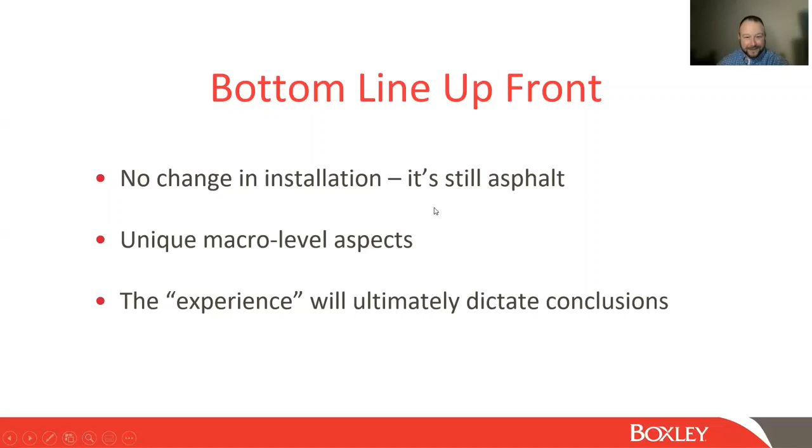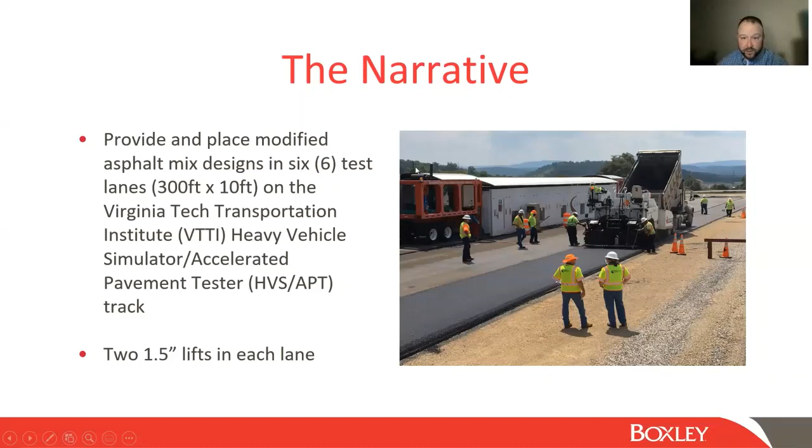The experience will ultimately dictate conclusions. Well, you just heard mine. So I'll get off that soapbox, and I'll go to the next one. All right, so here's what we were asked to do. Provide and place modified asphalt mix designs in 6 test lanes, 300 by 10, at the VTTI Heavy Vehicle Simulator Accelerated Pavement Tester. Two 1.5-inch lifts to make 3 inches total. We did not have to tack in between lifts.

Here's the designs. Regular typical production mix, 30% RAP, PG64, and that was our control mix. That was day 1. Day 2 was 30% RAP, but optimized with BMD. Day 3, 45% RAP, PG64, optimized with BMD. Day 4 was 45% RAP, PG64 plus rejuvenator to soften it up a little bit. Day 5 was 45% RAP with a softer binder, PG58. And day 6 was 60% RAP with a softer binder and rejuvenator, as you would expect, to soften up that high RAP content.

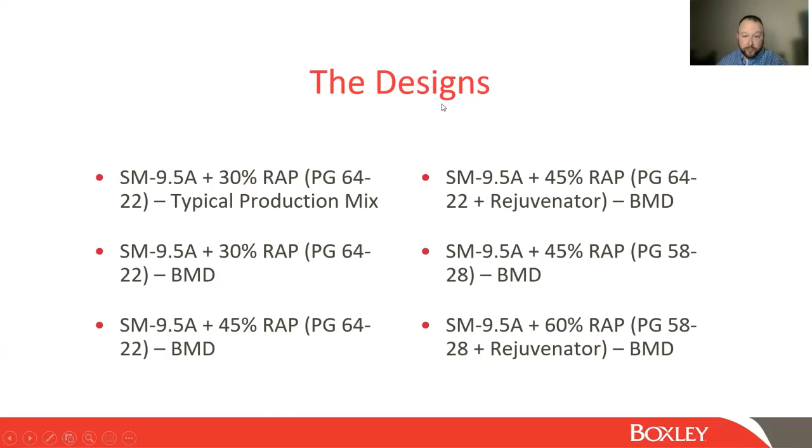Don't be afraid, I'm not going to go crazy into depth on all 6 of these mixes and everything. We would be here all day. I'm really focused on the field ops. Our plant personnel and our QC personnel did a wonderful job getting this ready and collaborating with the Research Council and materials, so we could actually put it down and get the equipment at VTTI on it, so they can do the actual research. And I'll let the professors brief us when all the research is done on how each mix performed. But we will give you our perspective as we saw it in the field.

I've already talked about this, and I'm going to reiterate it again. If you have a good relationship with your materials, like your VDOT materials department, like we do, and it's not just like we're friends out of work or anything like that, it's very professional. We were so impressed with how professionally Salem Materials ran this project. And not just them, VTTI, the Research Council, and the Asphalt Association sat in on a lot of the calls. It was truly a blessing and an honor to be a part of the people that were giving input and opinions on what we needed to do to get the project done.

So it was highly research oriented and plant driven, which is completely opposite to what I'm used to, getting as many tons down in a safe and high quality manner as possible. Didn't care about that. You were maybe laying 80 to 90 tons a day per mix. And you're there for 2 to 3 days each, and that takes up a week. Ouch. If you're doing that 3 days in a row on a normal job, something's going wrong.

Like I've said earlier, smart people everywhere, a lot of vested interests. So as a project manager, as an operations guy, when you get involved with some of these projects, just remember, it's not just you versus the customer, or you versus VDOT, which unfortunately sometimes happens in other projects. In this, it was collaborative from start to finish, and I was happy to be a part of it.

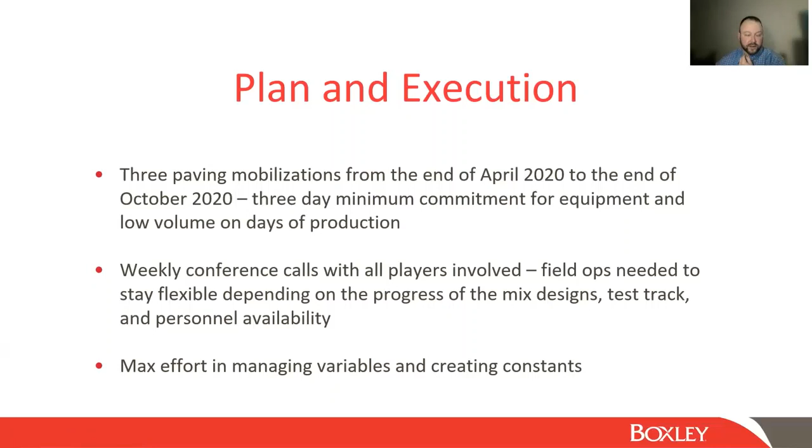Managing variables. I wish I could manage all the variables in my life as well as the QC personnel managed all their stuff, at the plant and in the field, really. But there were pills required for each lift of asphalt produced in the test lane. So 2 sets of 12 per lift of asphalt, 48 total pills per asphalt type. So a lot of pressure on the QC personnel to sample between lifts. They could not send the second lift until they had a certain number of pills pass after the first lift.

Well, they can't tell how many pills will pass after the first lift until the pills that they took after that first lift cool. So one of the things that QC ran into at the plant was they had to figure out a way to cool these things down quicker, because we're sitting there up in the field with rain coming, like, hey, hurry up. We cut all our cores. The new guys are already starting to weigh the cores and everything. We're just sitting there, ready to go and looking at weather on the radar. So that was just the first couple of days.

But after that, our QC got with materials. And like I said, we had a weekly conference call, got with VTTI, got with the Research Council. What they did, they went and got another air conditioning unit and 2 high-powered fans to cool down the pills quicker. And once they did that, man, everything changed. Something that simple. So credit to them.

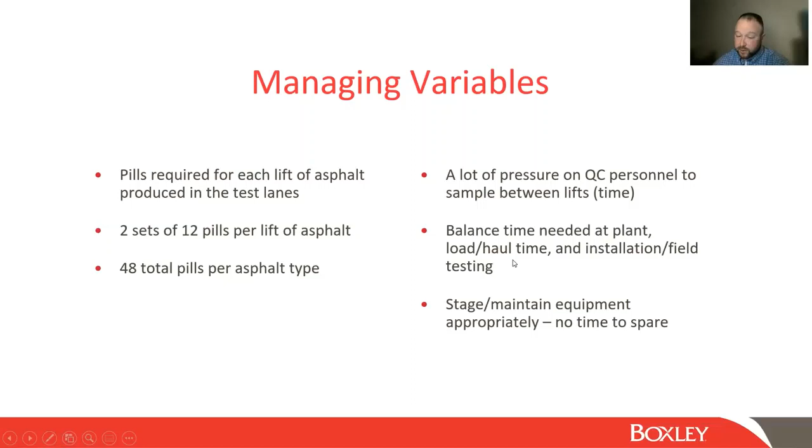But once they were ready, we had to get it down. So we had to stage and maintain equipment appropriately. No time to spare. We had spare equipment on site, so if a roller went down, we could easily replace it. And we had a spare paver at another job in Christiansburg, but it was still close by. If we needed to go get it, we could. The heroes at the plant getting all their samples.

So creating constants. This is something that they really harped on, and not harped, but for good reason. They needed to. We needed uniformity on all these mixes, as much uniformity as we could, with as much that was going into getting these mixes to pass the balanced mix design process. The least we can do is lay them at a uniform depth, right? So 3 inches, our allowable thickness tolerance was 1/4 inch.

So that was a lesson learned, that if someone gets another contract like this in the future, just be mindful. A lot of cores taken, a lot of cores. So I had about half the crew out there with saws and the other half with leaf blowers blowing all the dust out, so we could get all the cores cut in a timely manner. Because towards the end of the summer, the plant was really moving and humming along, and they were ready to send the second lift. And we didn't want to be out there till 5 or 6 o'clock each day.

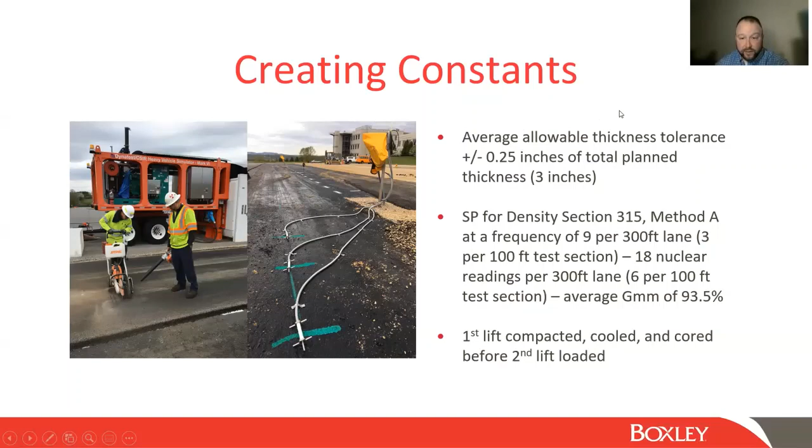Field performance. So the only mix we struggled to achieve density on was actually the first lift on the very first mix that we laid, which was the control mix, which wasn't a good start. But like I said, we had wonderful collaboration with materials and the Research Council. We continued, and then we ended up milling up that lane and putting it back later on in the summer. So we had a valid control to go off of. But lessons were learned from that.

We got a bigger roller out there, and made sure that we were putting the lifts down at a constant as the other lanes. Where all the lanes were 10 foot, that lane ended up being 12 foot, but that really doesn't matter. We fixed it, and we got a good control towards the end of the summer. All other high RAP mixes optimized with BMD had no problem achieving density, and they did so rather quickly. So that's important as far as lesson learned.

When BMD does become the thing, and we are on contracts in which we're trying to get production, that is going to help, because the density was achieved quickly. That means lesser roller patterns. So that is something that will affect field ops positively in the future. As far as this certain project or any other pilot project, research driven in the future, probably doesn't affect it that much. But when you're trying to lay as much as possible on some of these production driven contracts, it's going to be a big deal.

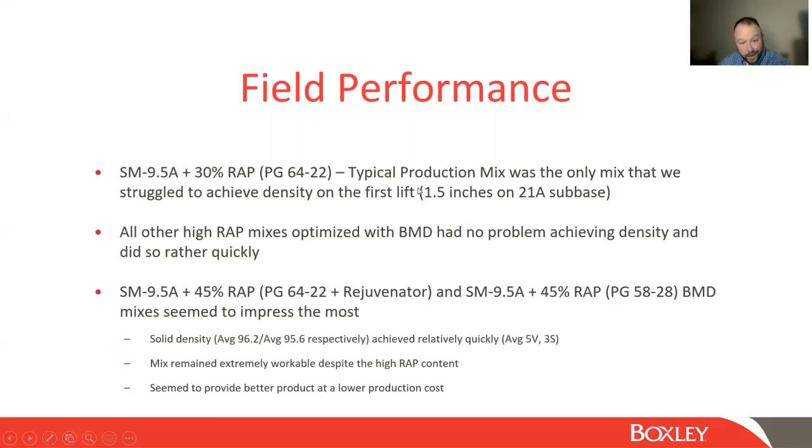So I wish we had better pictures. You really can't see, as far as the pictures that we took of all the mixes. I mean, it just looks like mix, but people that have a chance to make this mix and lay it, I think you're going to be impressed. It was a beautiful looking mix. The high RAP content obviously stiffening it up, but the rejuvenator and then the softer binder bringing it back to a more balanced state. It was a wonderful mix to look at.

Impact of high RAP BMD mixes on field ops. So like I said, that's really all we did in this project. It was all high RAP mixes optimized with BMD. So positive: easily obtainable density results, quicker roller patterns will speed up production, and the higher RAP percentage will reduce production costs compared to traditional mixes and also provide better performance.

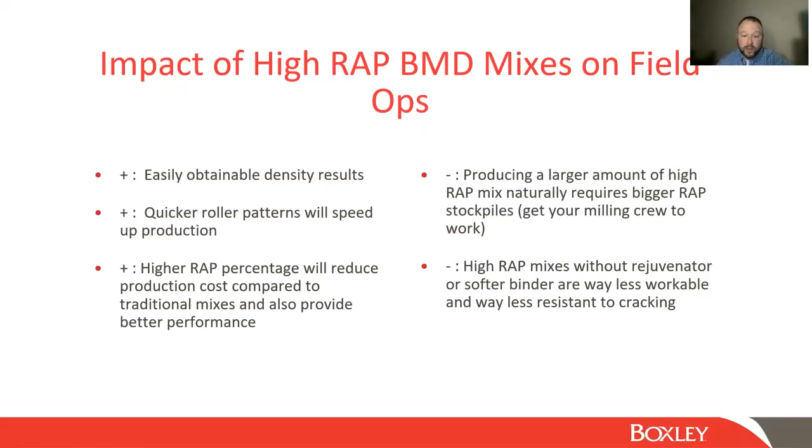Negative is, hey, if you're producing a larger amount of high RAP mix, naturally that requires bigger RAP stockpiles. So you better have enough work to keep your milling crew busy. High RAP mixes without rejuvenator or softer binder are way less workable and way less resistant to cracking.

So all in all, just to conclude, again, this was one of the most unique projects Boxley has had the pleasure of participating in. Other contractors out there, you should not be afraid. You're going to learn a lot.

And if you've got room in your backlog and you've got flexibility in your schedule, I would encourage projects like this, especially with the type of people that we dealt with. You should not shy away. So the spirit of cooperation can go a long way. We learned that on this project, and we'll continue to try to get back and do more of this in the future, to be honest.

Macro level operations are the ones most affected. We talked about the schedule. You're really blocking out a week of time for one crew, and especially a set of equipment. Low volume, equipment redundancy, making sure you have spares there, because once the plant's ready, we need to perform. The time it took during the day, so you're going to have high labor with low tonnage. That's just the way it's going to be. But just realize it's research driven, and this is the way it has to go. And priority. You have to make projects like this a priority, or it's not going to work, because everyone else is going one direction. You need to make sure you follow suit.

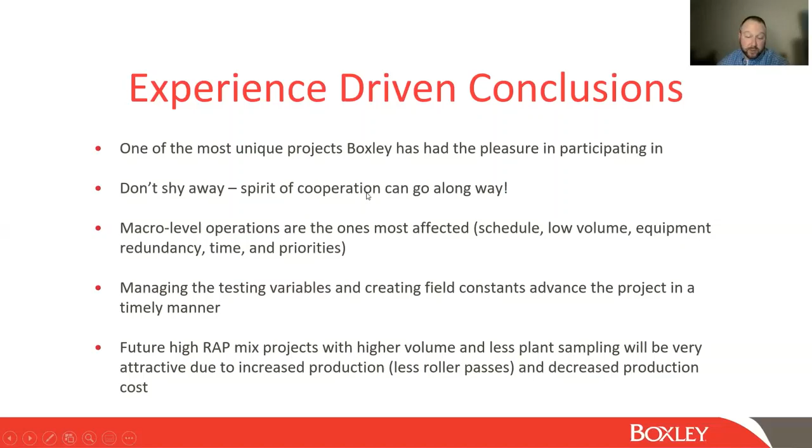Future high RAP mix projects with higher volume and less plant sampling will be very attractive due to increased production, less roller passes, and decreased production costs. What more could you want, right? I mean, other than having to keep higher stockpiles of RAP, and how much milling work you have in the future if they do go to these high RAP mixes. But the less roller passes will speed you up, and obviously it'll cost less to make the mix.

Overall, I hope I was able to glean some information on some of the unique aspects of what we experienced last summer. The overall message I'd like to send to everyone here, and thanks for listening to me, is that this was a wonderful experience, and we learned a lot from it. I encourage everyone to try to be a part of one of these projects in the future. And will it affect field ops? Yes, it'll affect your schedule. It'll affect the way you think on certain timelines and on certain days of production. But end all be all, you work as a team with VDOT and Research Council and the Asphalt Association, and I think we gave them a good product.

So I'm really excited to see all the research that comes out of it, and I hope that everyone here has learned a good bit of what some of these projects look like for bidding in the future.

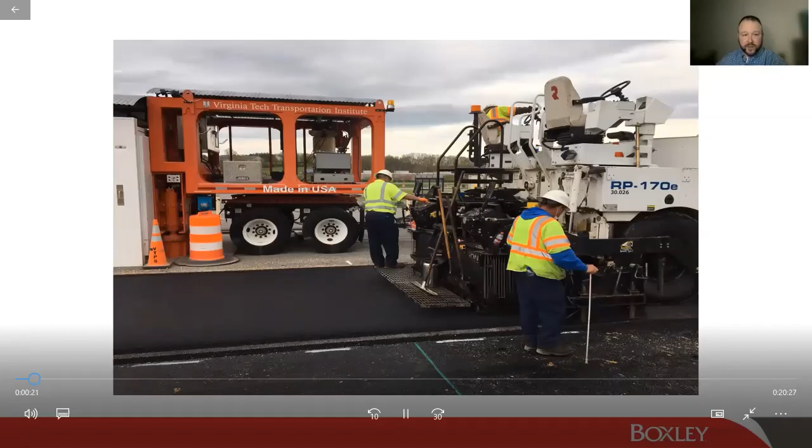Hi, everyone. My name is Travis Light. I work with Boxley in Salem, Virginia, and I've been asked to give a presentation to you today on the Balanced Mix Design Initiative and will it impact field operations. We had a very unique project up in Blacksburg, Virginia in 2020, up at the Virginia Tech Transportation Institute. And because we participated in this project is the reason I'm giving you this brief. To be very simple in my explanation, it was unlike any